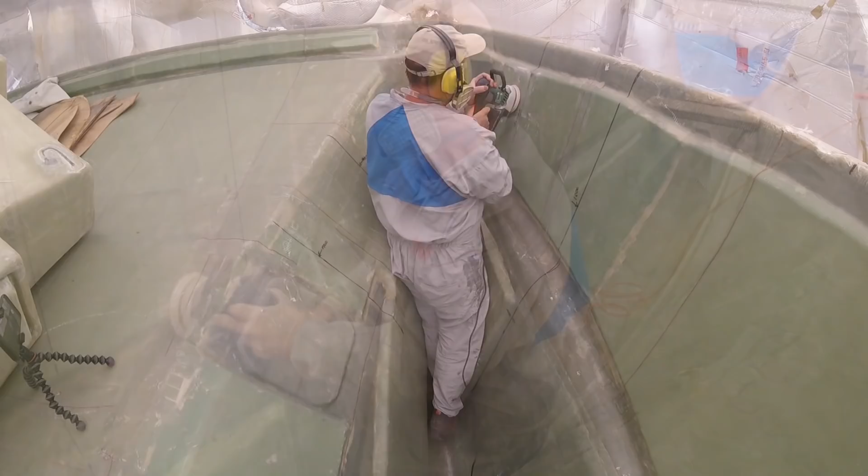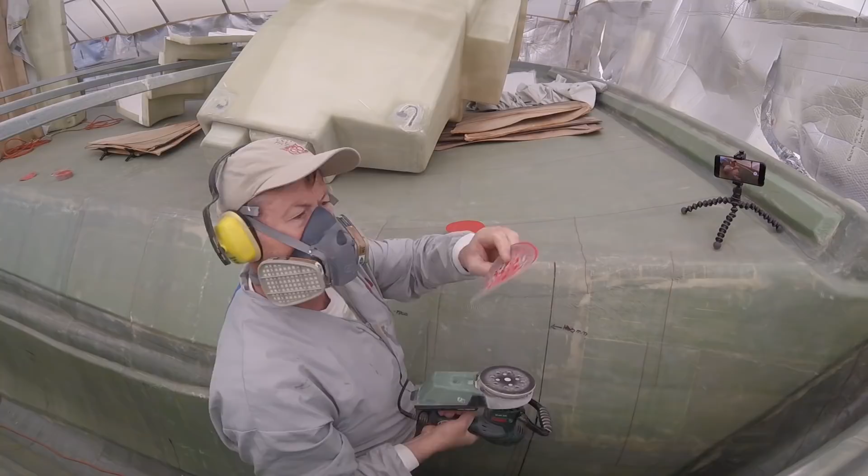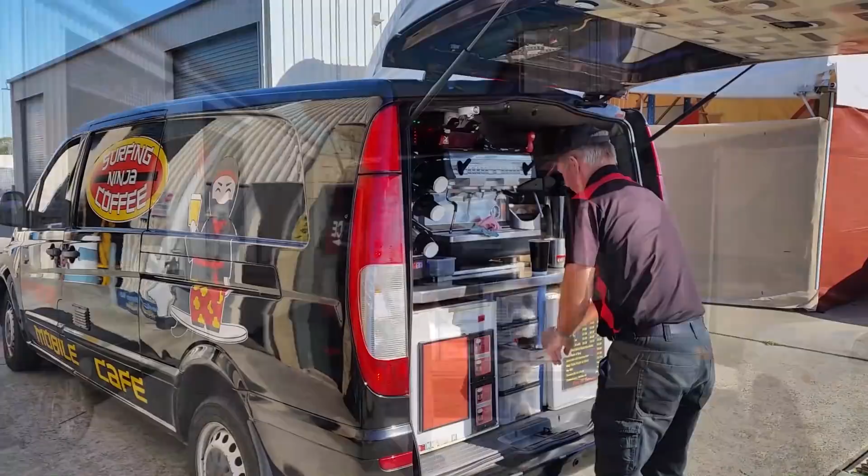Oh, it's coffee time. Keithy's here. Keithy's not here. Surfing ninja. Oh, thank God we got Keith. Thank you, mate. Thanks for my coffee. Good on you, mate. Thank you. The ninja.

Back up into the mould.

I can sit here and study my plans every morning with my coffee. Very important time.

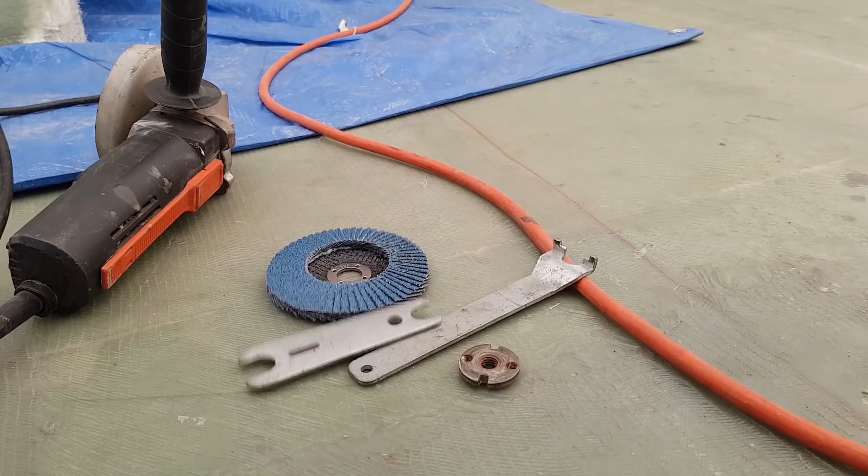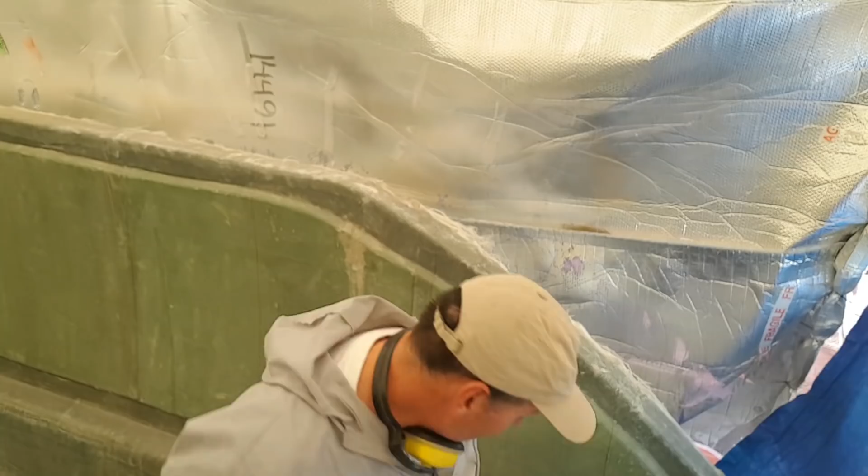So things are going to get pretty messy here. I'm going to get in with this little 5-inch flap disc. These things eat through the fibreglass like it's nothing. You buy about 500 of them at a time because you go through them pretty quickly.

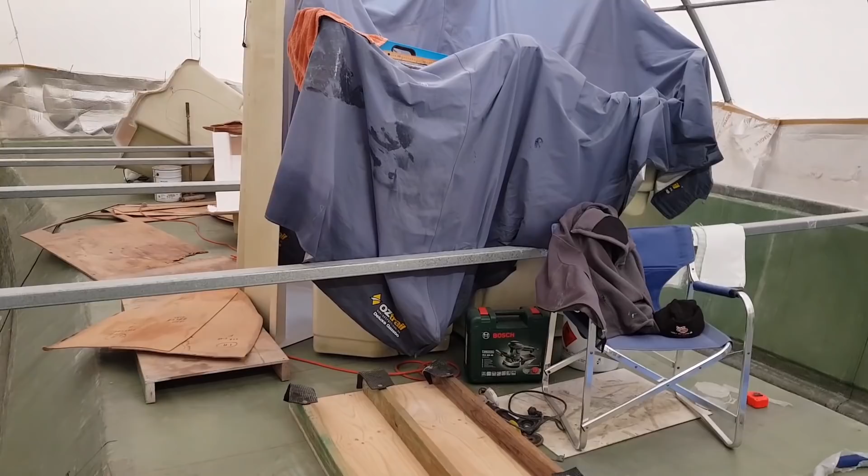I have just finished 8 hours of solid grinding and sanding, and now I'm vacuuming, mate. This place is a cesspit. Check this out, it is absolutely freaking disgusting. It's like a bomb's hit it in here. I've had to rip all of these modules out that I've had in position for months, and they're all just piled here, templates and everything, and I'm just vacuuming out all of the dust. It was like a snowstorm in here yesterday.

I've ground all of the flanges, the floor, and all the walls have been resanded for their final layer before I start putting in bulkheads. So yeah, a bit of a brothel. Gonna have to get into it today and try to tidy up a little bit and consolidate so that I can get glassing again on Monday.

Can't wait for that. Yeah, there's a bit more of it over here. I've tried to tidy up as much as possible. I've got stuff covered, but honestly, I'm fighting a losing battle here. This here is as clean as it could ever be.

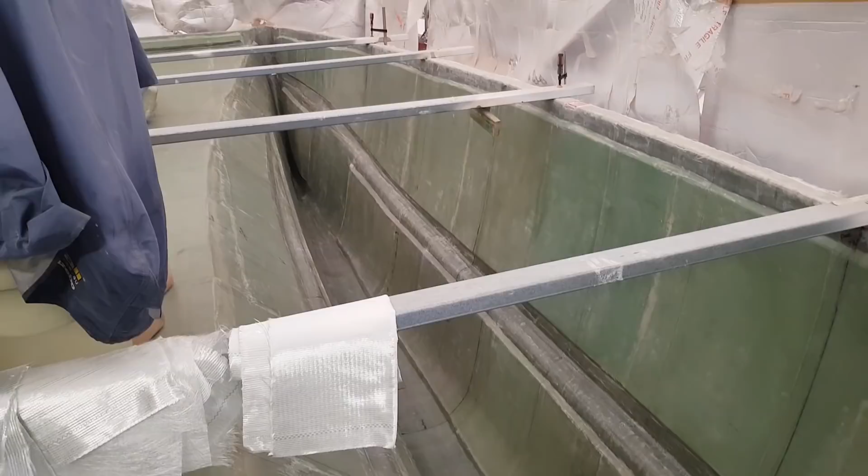Basically, I can run my hand over the entire surface without catching a burr, and that is just absolutely very pleasing to be able to do, because now I'm ready for that final 300 CSM.

I'm just about to laminate this week the last layer on the hull here, so I've spent all week pretty much sanding it and getting it all prepared, and it's absolutely perfect. Honestly, you can run your hand right along it without even getting a burr. I've roughened it up and basically taken any little burrs and edges off of it.

My next job is to determine where the forward bulkheads are, and therefore the ones further back at each station, and I already have that. If you have a look up here, I'll put a close-up of this image back up again.

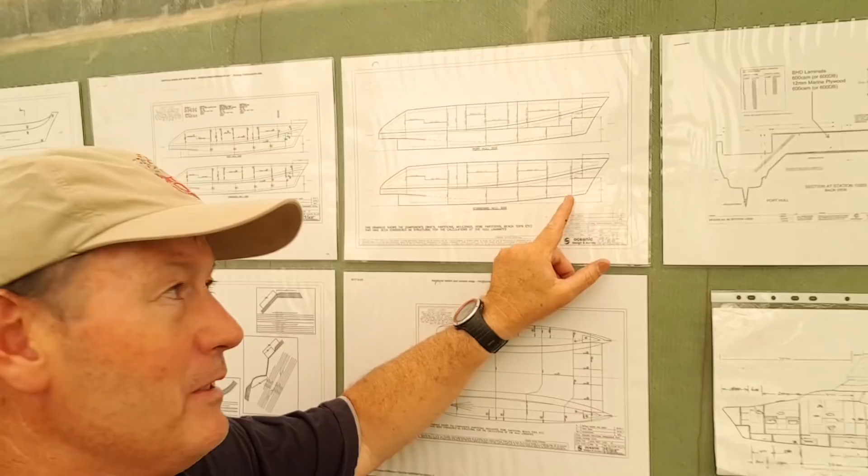This area here, right here, we have a crash bulkhead. That crash bulkhead is determined from the very bow of the boat, which is the very tip of the boat up here, right back 1.8 or 1800 millimeters from the bow, and that bulkhead is an air-filled chamber. So this here is an air-filled chamber, and then we have a flat horizontal bulkhead, and then another one at 1.3.

So I'm going to determine them by running a string line, and I've got a way to do that that's reasonably accurate, basically by using a plumb line off the purlins to measure that up. By doing that I'll get the exact position for each bulkhead on each side, and once I laminate them in, I can then move on to the further ones, but I will always try to measure from the very bow rather than from each subsequent bulkhead.

That'll ensure that my stations are in exactly the right position for when I put in all the modules. It's going to be a bit of a process because it's so deep, it's very hard to get the center point of each bulkhead.

So what I'm going to do is use these big metal purlins I have here to get them exactly aligned, and then I'm going to drop a plumb line straight off them to find the center point. I think that's probably the best method because I've got so many curves and contours to deal with. A plumb line will give me a perfect center for the alignment of my bulkhead.

So that's what I'm trying to do, but I've got to move a few things around before I do that to get the exact line. So this forward head's going to move forward, that way get it out of the way so I can start working out where everything goes.

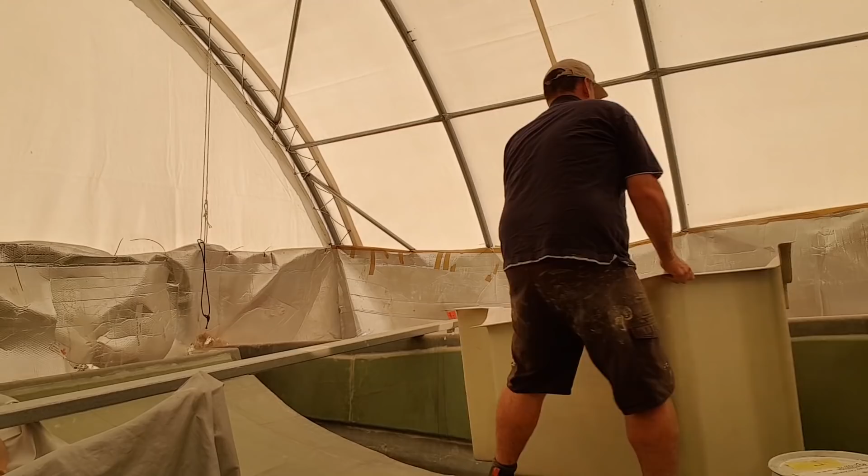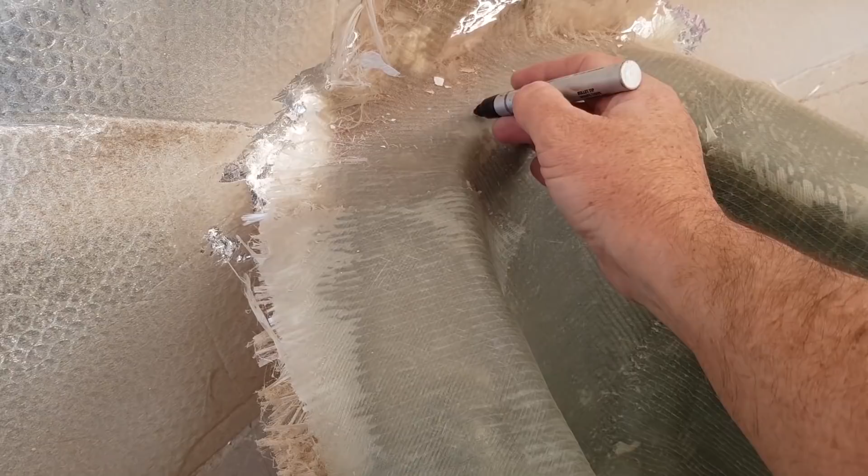Yeah, that was pretty easy. Right, so the first point I need is one from 1.8 from the exact bow, firstly working out where that is. Now the exact bow is there—not right up at the front, because that's actually the flange, but that's allowing for a bit of thickness in the hull, and obviously that's where I need to be measuring from, not the front of the flange.

Alright, so I've clamped the purlin to the top of the deck, and I've got 1800 millimetres, 1.8 metres, to the exact bow. It's pretty well spot on.

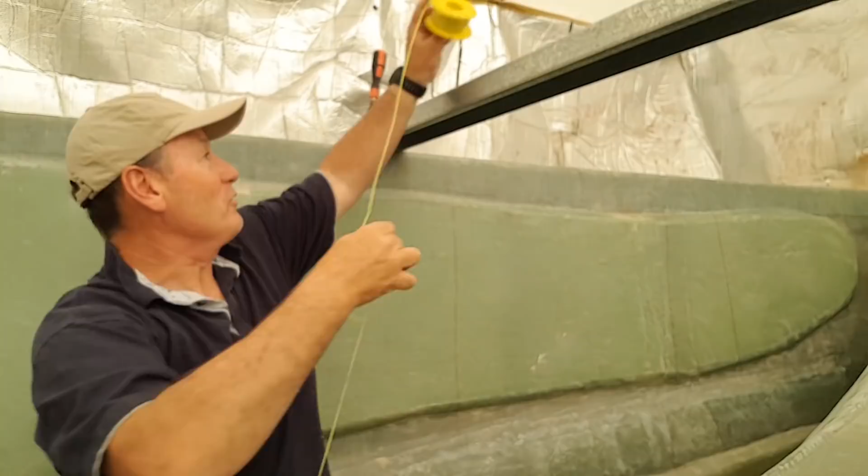So I have determined the exact position for the front bulkhead, which is actually on the aft face of this purlin. I'll drop a string line down to find the exact centre of my bulkhead. Okay, because I don't have a plumb bob, I've just found something I can centre—a screwdriver, it'll do the job. Over the top, and hopefully I'll be able to find my centre.

So now I've found my distance from the bow, and I've dropped a plumb line here down to the floor. I now have a perfect position at 1.8 metres from the exact bow.

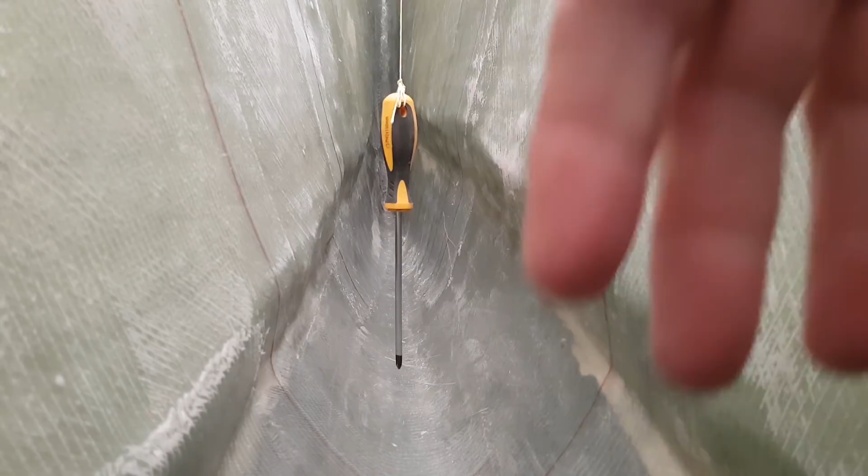Okay, so we're down here in the bow. This is the plumb line here, you can see it's pretty well stabilised. That's exactly 1.8 metres from the actual bow, that's what I've been aiming for. That is the first of the crash bulkheads that has to go in. It's only a waist high one, actually about 1.3 up from the centre line of the hull.

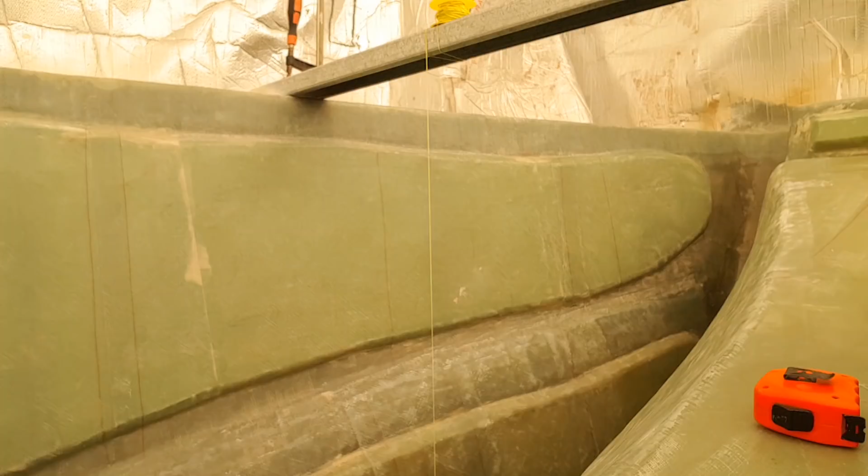So now I've got that point. What I want to do is get a point up here somewhere, because then I can make sure that it's straight and ensure that it's square. I can't rely on using a spirit level in here because it's just too many shapes, but by using a string with a plumb line on it, I get an exact indication of where these points need to be. So provided this is right, which it is, this should be exactly right. Shorten this right up.

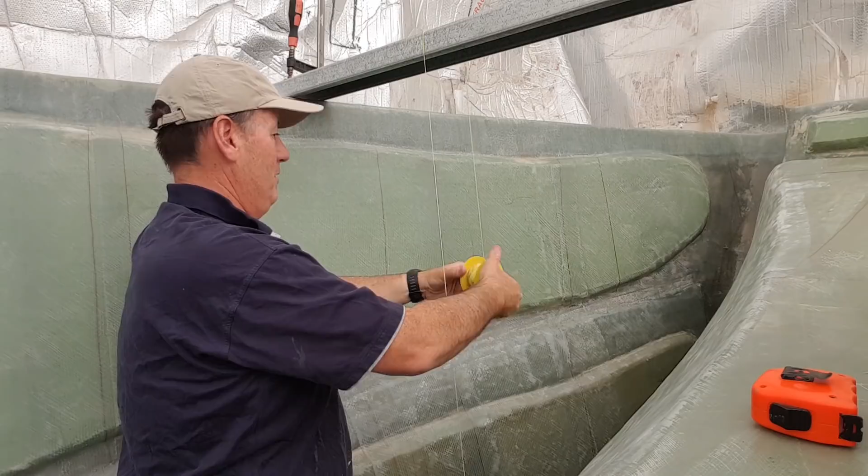Move it along. What I'm going to do, I'm going to take three: one halfway up the first foam panel, another one further up, and then again on the other side. That'll give me, hopefully, a pretty much dead accurate indication of where this bulkhead needs to sit.

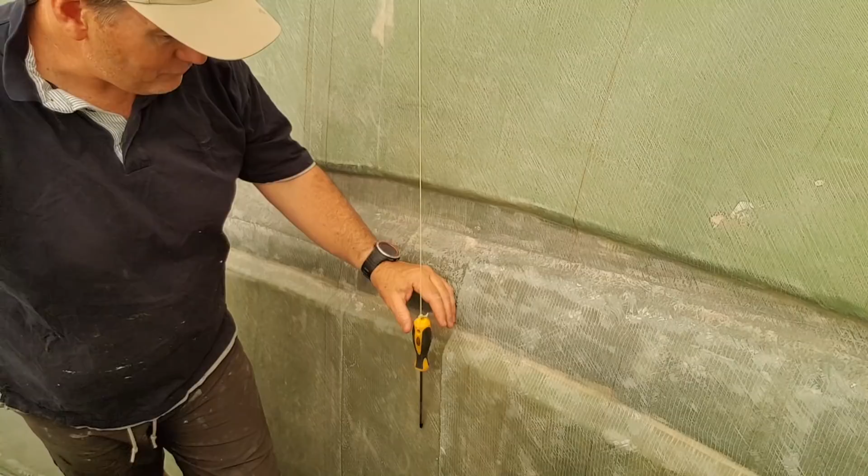So now I'll let it just dangle for a second, try to stabilise it a bit, see if I can get it as centred as possible. And see where it touches down, which is here. So that should line up with that one, and then I'll move it over to this side and do exactly the same thing. Hopefully that gives me a perfect indication as to where it's got to go.

So we get a little bit of swinging. And there it is there, it's that point right there. So make a mark and that's it.

So there's my three marks. They should all line up exactly 1.8 from the bow.

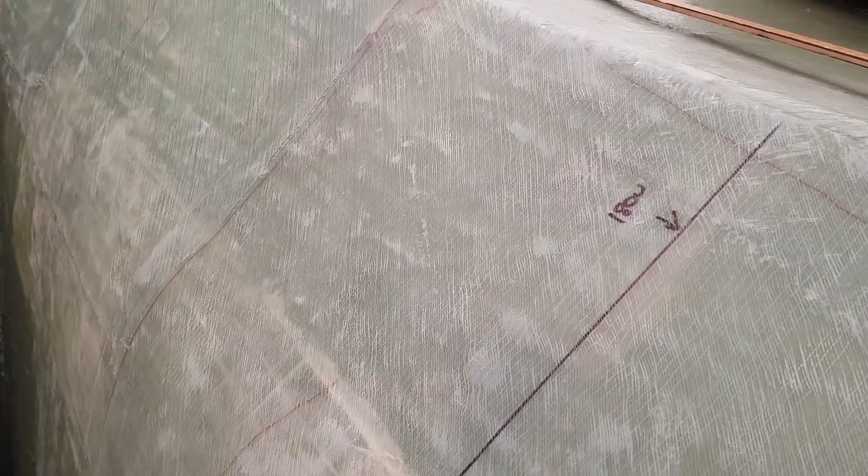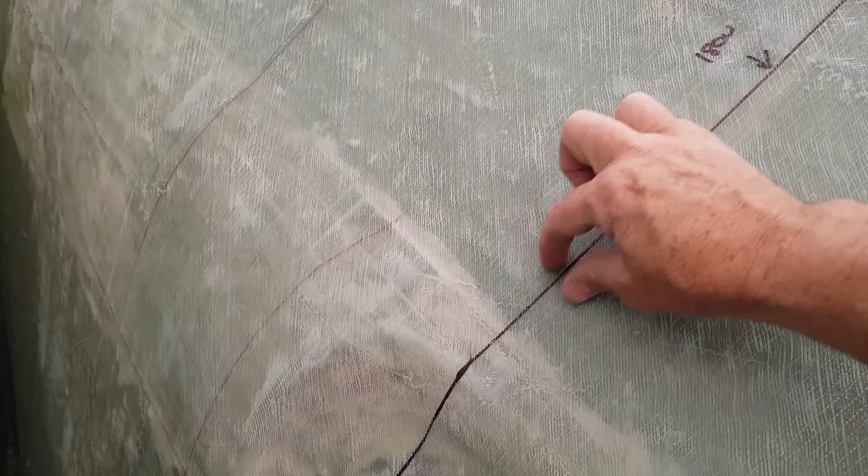So I've now determined the exact position of this bulkhead. And although I have templates for the bottom part, the bulkhead doesn't continue all the way up here. There's another one further down that does, so I can now determine at this point the next one. It's important to remember that the bulkhead doesn't sit on this side of the line—it actually sits on the line, so that is the centre line. I'm putting a 12mm foam bulkhead in this particular spot, so I'm going to have to allow 6mm either side plus the glass, so it's going to be about probably 15mm thick, bedded in and then tabbed in place.

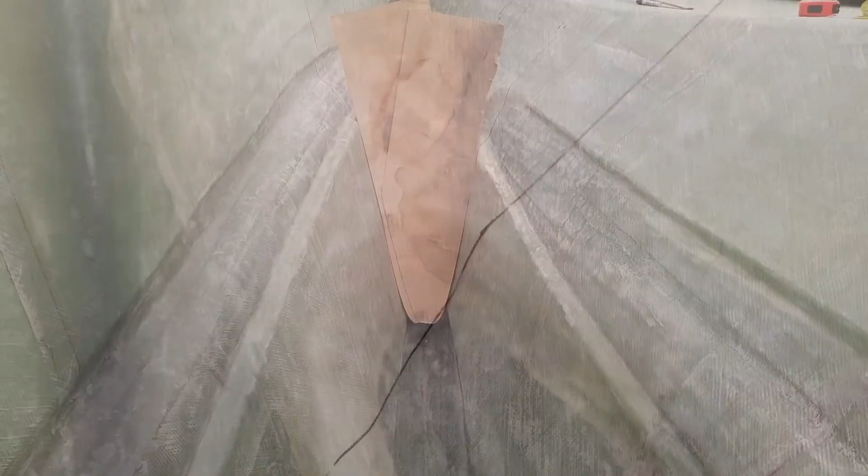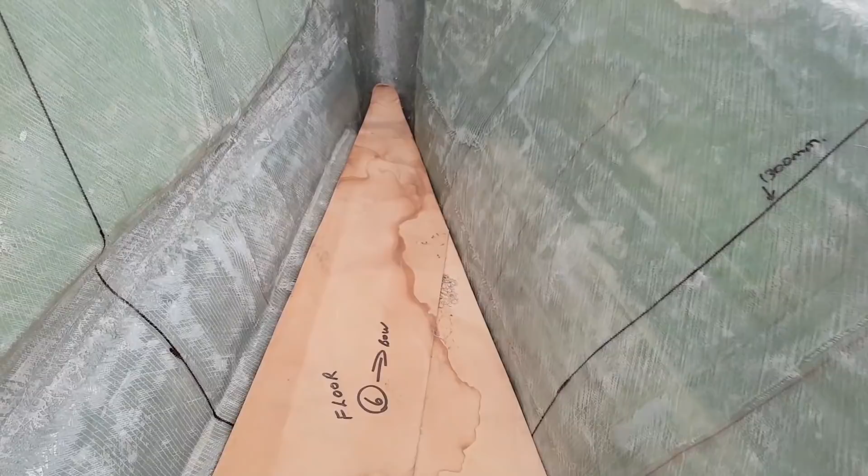Alright, so you can see I've positioned the template at 1.8. This only comes up to the height of, I think it's 1.3 from the bottom, or the absolute bottom of the boat, but this will be cut off around about here. And then that is the floor, so this will be the compartment for our crash bulkhead.

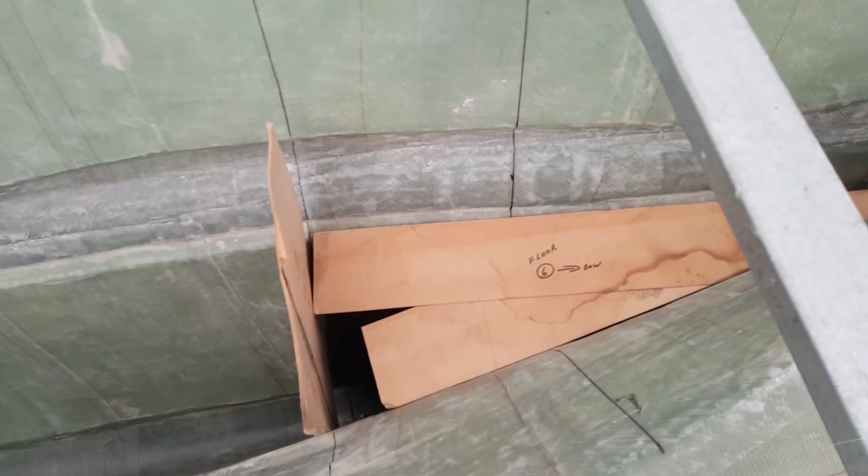A bit of a better view of it from up here, you can see what I'm getting at. So the position at 1.8, and then we have the floor template here. Just step over this purlin and get up onto the edge here—I'm about 15 feet up here.

There's going to be a storage locker, and there'll be a subsequent bulkhead at 1.3. This locker has a hatch on the front, moulded into the deck, but I'm not convinced I won't put a proper glass hatch on it instead. I don't particularly like it as is — it'll just be a rope locker. I don't want any weight up in this area if I can avoid it.

My next bulkhead is the main forward bulkhead. It's a further 600 on from the crash bulkhead, and this one goes across the bridge deck and elbows around the forward head. There are two positions I need to ascertain. Again, using the string line, I move the purlin back 600, take a string line off it, take a plumb line, and that gives me my position.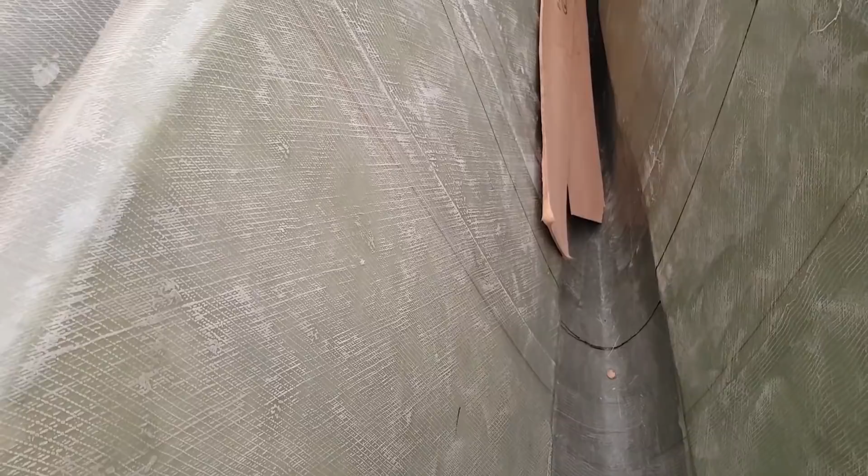I've made a mark here at 2400, another one here at 2400, and another one down here. This one doesn't go all the way to the floor — the bulkhead actually ends here because there's a floor panel underneath. I'm going to join these together, and that gives me my position for the forward plywood bulkhead. You can see the exact point here — a black mark down here, another up here — simply line these up.

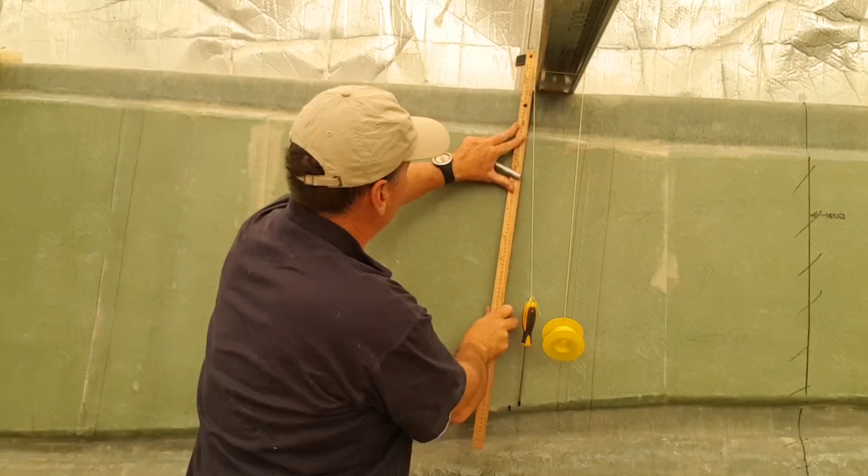That is 2400, and that is my main bulkhead.

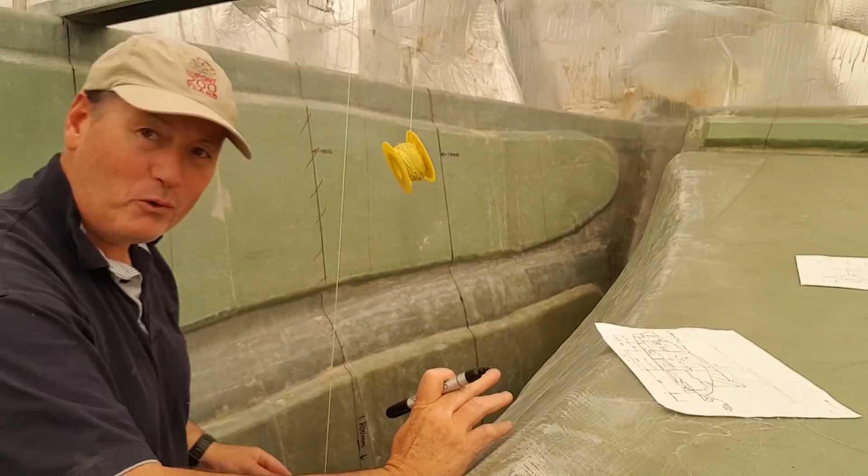So we're now on the inner side of the port bulkhead, or the port hull, working out where it's going to go. And there we have it — you can see that's all lined up. Now I could get a laser and try to laser all this, but this is a simple way. It's a way that's worked for millions of years, and it still continues to work. So here's our position here.

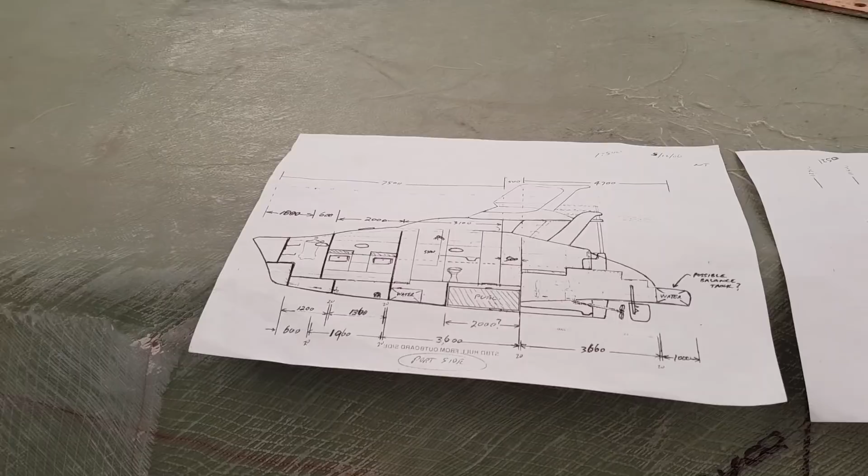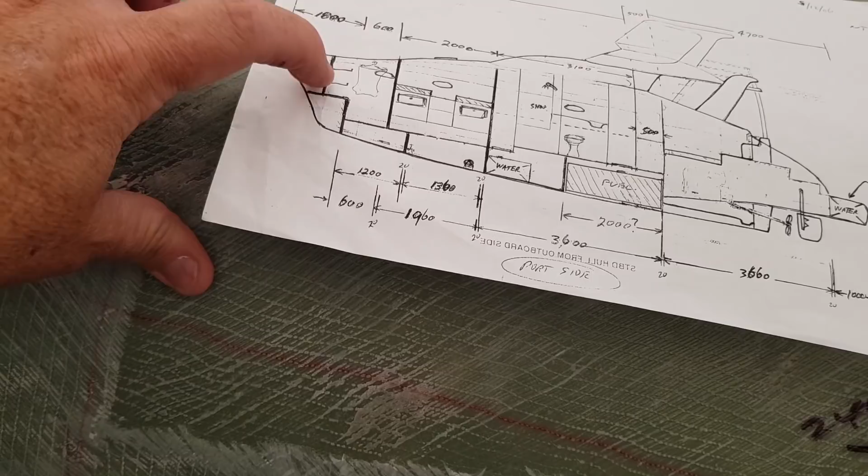So I have my outline here. This isn't the exact plan, but it's exactly the same as what the plan is — an outline I inherited when I purchased all this mould. You can see here we've gone 1800 from the bow — that's our first crash bulkhead. We've then gone back 300, so we have a crash bulkhead or storage locker up in the front, like a robe here. Then we've gone along another 600, and that's this main bulkhead here.

This one's actually a plywood bulkhead — a 25mm marine ply bulkhead sheathed in layers of 600 double bias on each side, which basically goes straight across, elbows and around that head over there. So you can see that in effect.

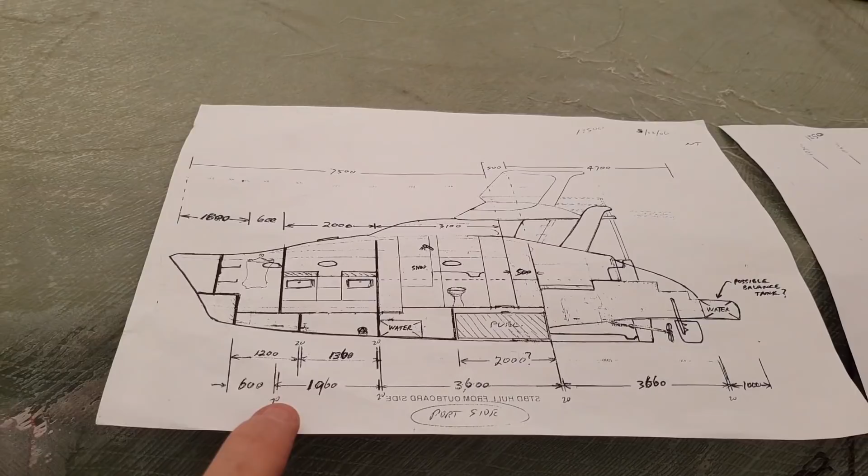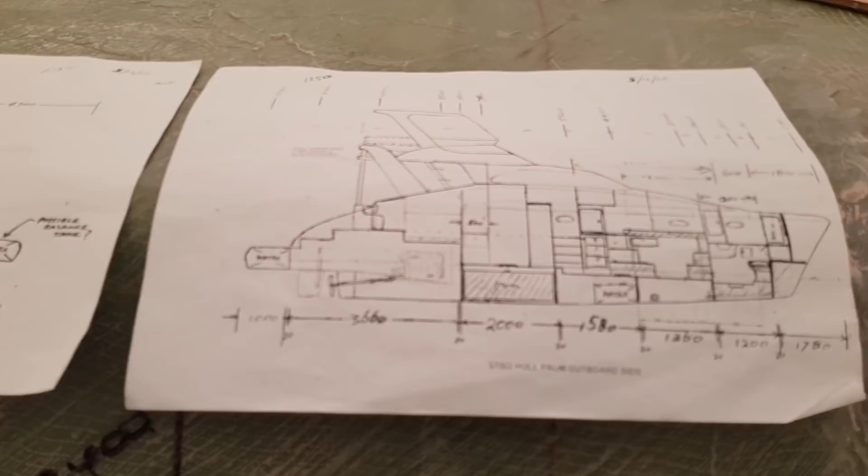We then have another bulkhead at 1200, down here in the floor — a floor bulkhead 1200 from the original crash bulkhead. In a moment, once I ascertain the other side, I'm going to determine this one, which is equal — have a look over here, this is my starboard hull, equal to the same bulkhead on the other side. Very, very detailed, and very important I get it exactly right. This is the time to do it before I lay my last layer of glass, and then I can just get straight onto it.

It's important I'm working from side to side. I can't go forward because I need that level all the way along. I need to measure, and both sides need to be done simultaneously.

One thing to consider is the original boat was solid glass, only about this thick, maybe 2 or 3 mils thicker. I've now gone to 30 mil foam in the hull here. This bulkhead — you can see down the bottom here, there's a massive gap. Now I need to reshape these bulkheads to fit them accordingly to ensure I get the correct fit.

I'm going to put a limber hole in all of these bulkheads, basically to drain to around 2 or 3 bilge pumps down in the bilge. But I've got to adjust these bulkheads — they don't fit at the moment, but they will once I get templating. These ones are 12 mil grid H80 foam. As I get further down the back there, I'm going to run into the same problems — every template I have is going to have to be adjusted for that particular problem.

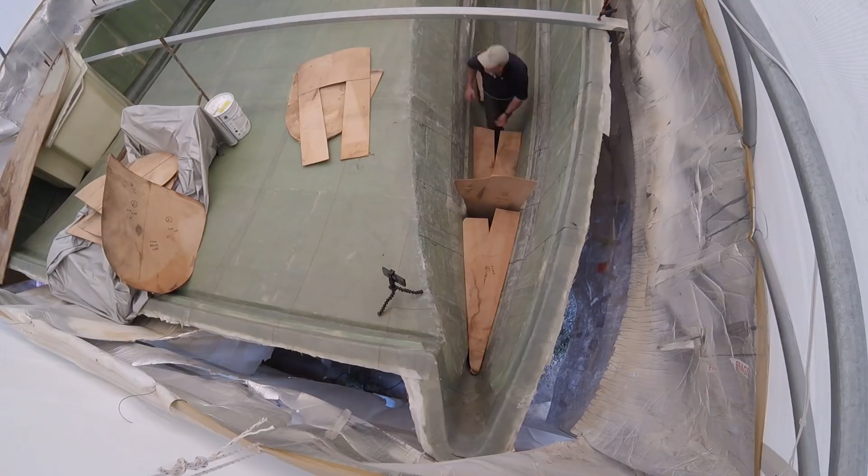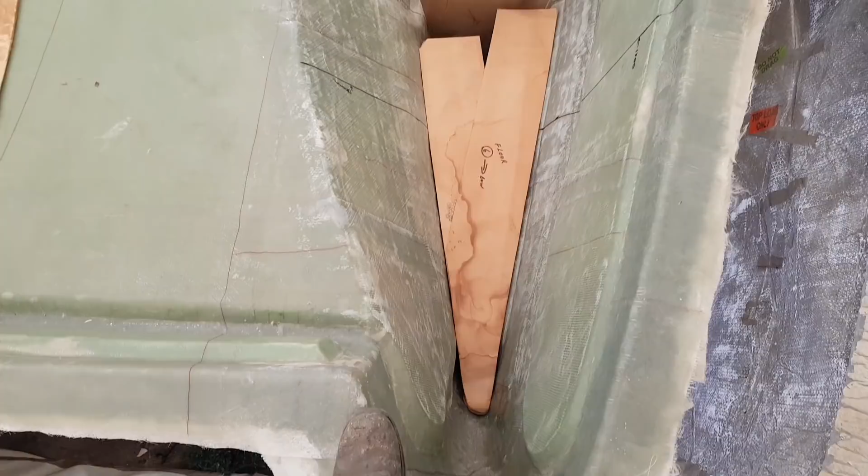So that was a bit of a long one, guys. I'm going to leave you with this fabulous time lapse I shot of me placing the bulkhead templates in place, giving me an idea as to the layout of the floor and the bulkhead regions I've got to now fabricate. It certainly is a pleasing event to be able to place physical things in place rather than just looking at plans.

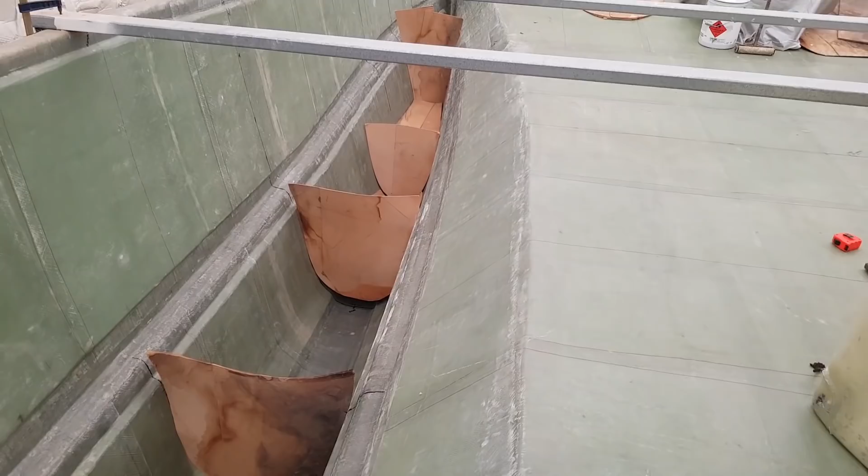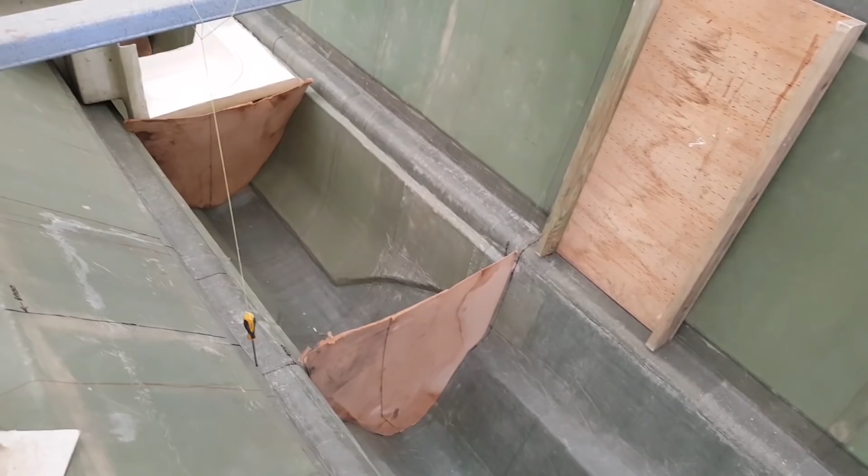By putting the modules in this boat, I really got a good feel for how this whole thing's going to lay out. So if you enjoyed it, feel free to watch another couple of them, and I'll see you next time on Life on the Mould.